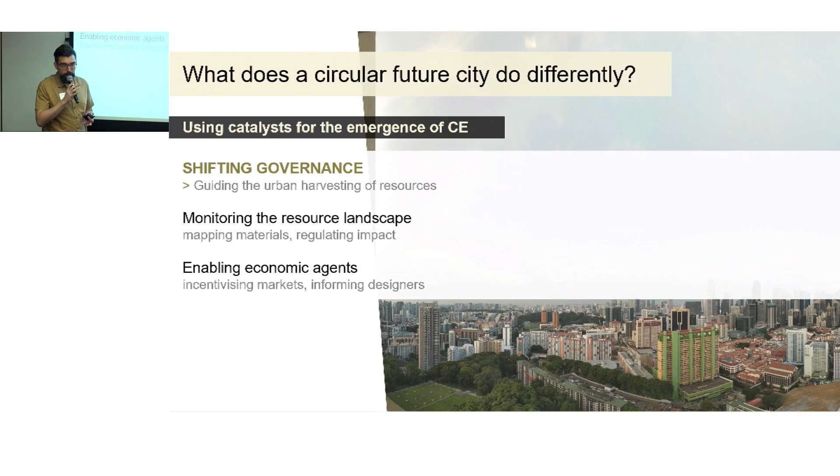The other aspect is enabling economic agents. It's, of course, an economy. It needs to run by itself. So there's an aspect of incentivizing markets, but also informing designers, for example, as agents to create structures that have more value that can be retained for longer.

Of course, within the FCL Global program, we're looking at new technologies and how that can help understand the circular economy of construction. And three aspects there are particularly important. One is mapping stocks, flows, and yields, as I already mentioned, but also evaluating built assets in terms of circular economy objectives. So not just in terms of money or not just in terms of carbon, but how do things work in this flow of resources?

Finally, it's also important to look into how can we trade, because we're talking about an economy. So how can we trade future building information is important. Buildings are particularly difficult because the value, the materials come out maybe 100 years from now. And the information that's tied to these materials, to these buildings, strongly influences the value we give to it. So how can we bring that future information into the present is another technological question that we have proposed solutions for.

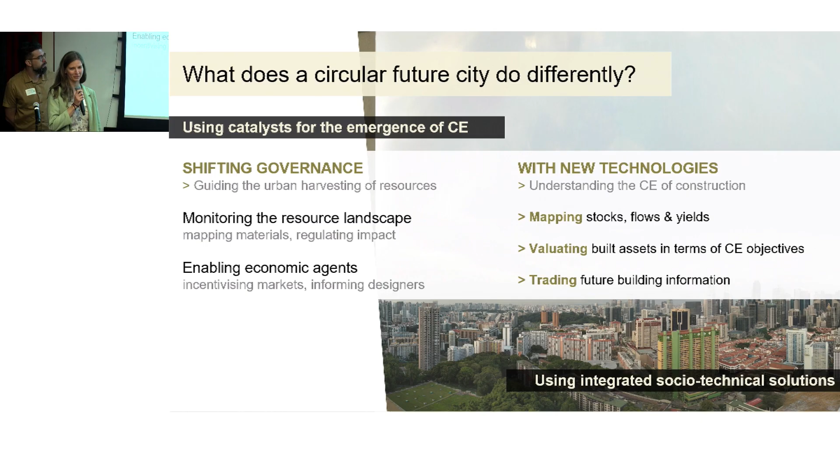Okay, so now it's my turn to tell you a bit more about the research that we have done in our module. So let me start with different examples of how we can map material stocks. And the first example has to do with energy performance certificates. So this is a kind of data source that we have plenty of in Switzerland for thousands of buildings. So then we're able to extract material information from these building certificates.

So here, for example, you see a concrete building somewhere in Switzerland, and we were able to extract information about the main material type and also the size of insulation. And then this combined with architectural knowledge enables us to study how much material there is in different types of buildings and analyze that in the context of how building characteristics can influence the material composition in these buildings, both spatial patterns, temporal patterns, also other types of characteristics.

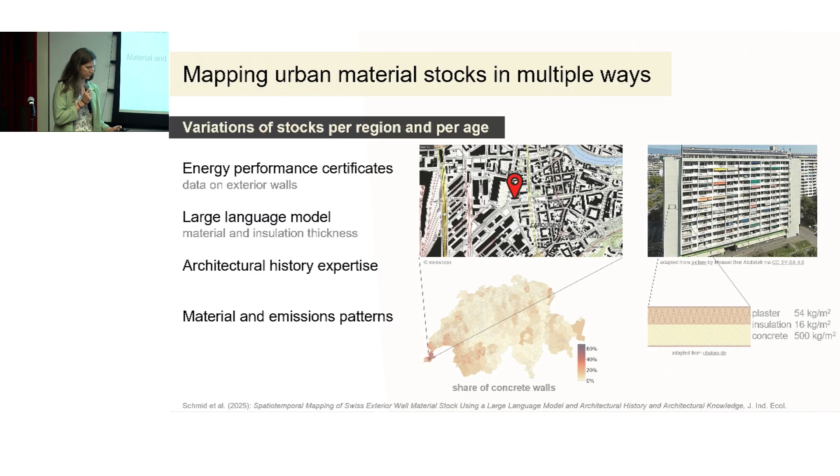Another example, again, mapping material stock, is in Singapore. So in Singapore, unfortunately, we don't have as much information on materials in buildings. But then for the few building instances that we had, we were able to develop parametric archetypes that then exploit some similarities between buildings to be able to extrapolate material information to the level of the entire country. And then this allows to quantify information, for example, on amount of concrete or steel.

One more example of how we can map material stock has been performed on different cities. Here you can see Cape Town, Zurich, New York, Tokyo. What we exploited here is Google Street View data. So when you walk around on the street, you see building facades and are able to see what kind of material is out there, how many windows, size of windows. This model exploits computer vision to use street view imagery to analyze material information from facades.

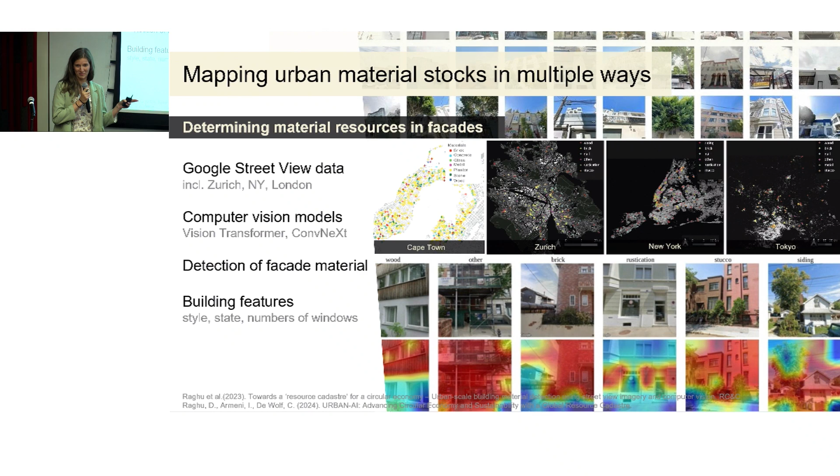Also building features like style and state, for example deterioration level. We're actually now working on combining this with the other model, because one gives us information about what's inside of the building wall, and this one gives us information on the outside. So that's work in progress still.

Another aspect of our research concerns trading information. As Peter has mentioned, we need to enable actors to exchange this information effectively. So we might know what's inside of our buildings, we might know what kind of materials are available, but you still have to exchange this information to manage it, to store it. So this research has explored the centralized data marketplace, and how a decentralized system could be a more efficient way of handling this kind of information.

When it comes to different actors that we have, we also want to inform designers on which kinds of circular economy objectives are out there, and depending on the objective, which here we highlighted three: longevity, reusability, transformability. These three might be important to a different extent to different designers. So we have created this framework that explores the links between the objectives and the design strategies, and then the methods that can be used to explore these.

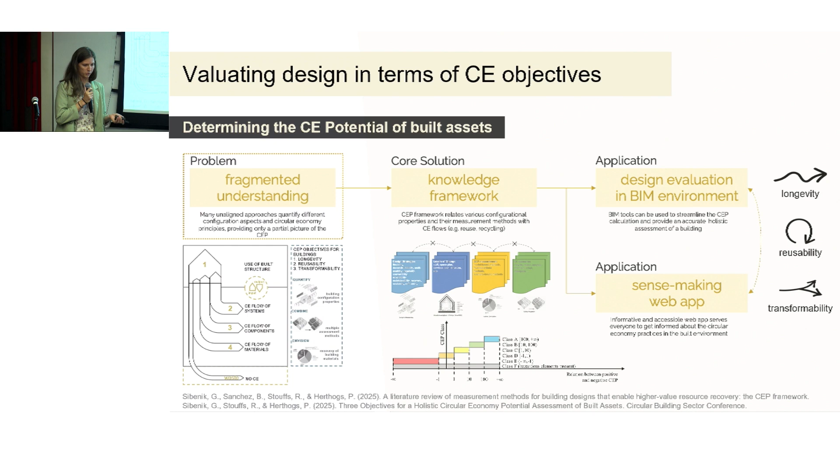One application of this framework that we also explored is built afterlife. It's a QR code that you can scan, also visible on the tablet that we have on our module table. This basically allows you to explore these different objectives, for example longevity.

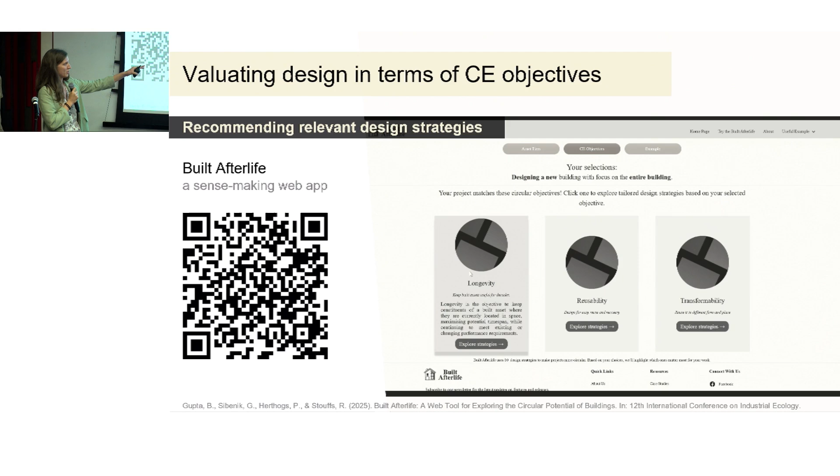So how lifetime extension can be important to you as a designer, and what methods you could apply in your work. Next example, also related to actors, is that we cannot take for granted that just because we're applying a circularity strategy, it will be beneficial for the environment. So this is an example of research that has explored the impacts of material reuse.

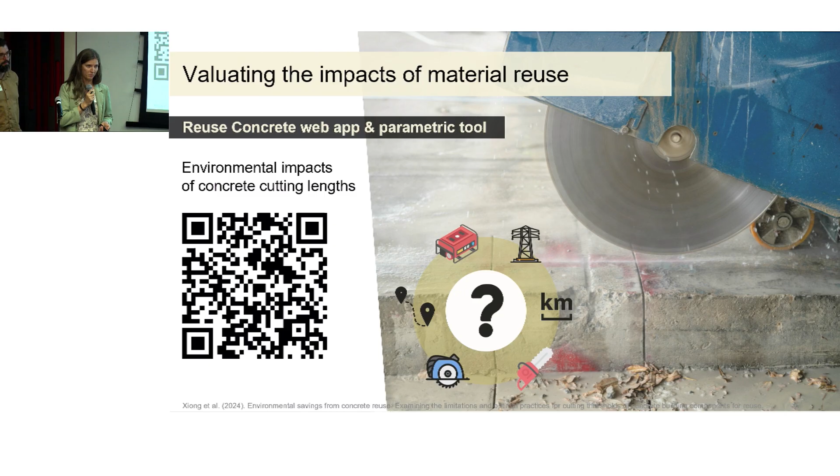In this case, it was reuse of concrete, and how different parameters of concrete reuse can influence environmental performance. Again, you have a tool that you can scan via QR code, to explore how different parameters, like the length of cutting, the transportation distances of these concrete components, will impact the environmental performance of this.

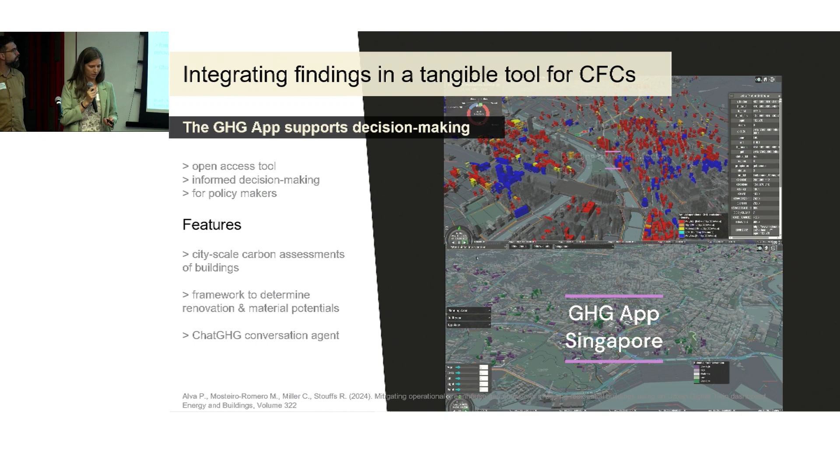And let me hand over. Okay, so that was a short overview of the technological outcomes of the Circular Future Cities module.

But of course, we also need to bring it back to the importance of governance. So throughout the module, we have been dialoguing about pathways to circular future cities with various stakeholders. Some of the things that have been going on in the last months, because this is what we're currently focusing on: for example, in July we had a special session at the ISAE 2025 about policy and paradigms.

We're putting the finishing touches on our synthesis paper, which looks at the type of technological innovations that typically come up in circular future cities related research, ours but also others, and putting this in a governance framework. We will also have a final session in our advisory board series, which looks specifically at how we can translate some of our outcomes into formats that are more useful to industry and governance. Thank you.

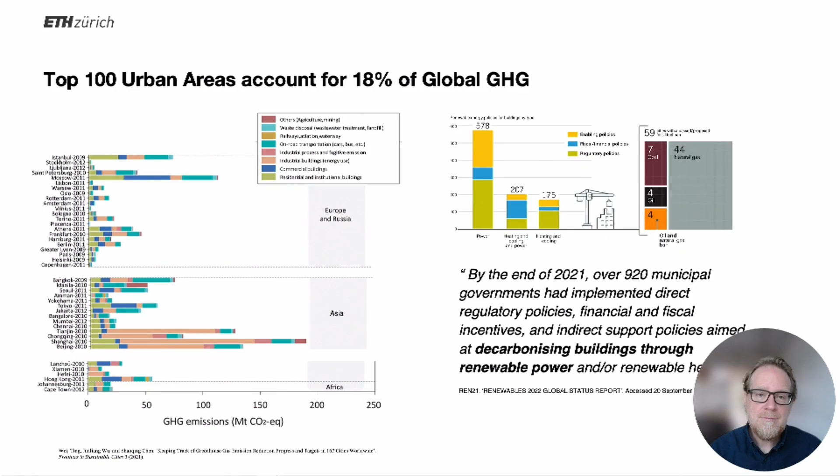One way to increase renewable energy production on the urban scale is what we call urban photovoltaics. The placement of PV modules on rooftops is commonplace and viable. We see this in Singapore, in Zurich, in many places. We are especially interested in what is called building integrated photovoltaics, BIPV, which closely merges energy production with building and infrastructure services. Different than standalone PV, BIPV is a PV module and a construction product together.

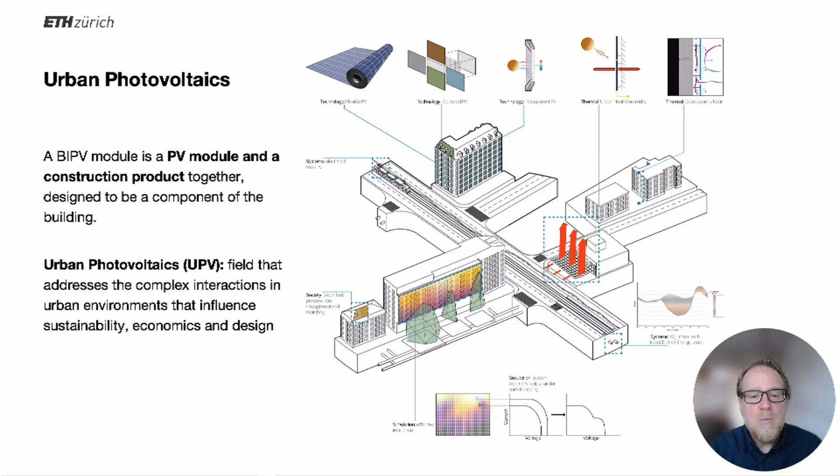Urban photovoltaics is a field that addresses the complex interactions that occur when integrating PV and BIPV in the urban environment, as we can see on the image to the right. This addresses questions of available surfaces, interactions with urban elements, but also how to utilize electricity produced most effectively.

As a module, we work interdisciplinary across different institutions and domains. Our work on UPV can be condensed into six research questions: how to scale, novel methods for estimating urban PV potentials; how to utilize, UPV in electric mobility, so how to use the produced electricity best; how to assess, questions of life cycle perspectives; how to implement, we looked at application case studies in Zurich and in Singapore; how to plan, how to combine different dimensions of planning for urban photovoltaics; and finally, how to design, which toolsets can support designers, engineers, and decision makers to plan and design urban photovoltaics.

In the following, I'd like to highlight the most important findings on those questions. On the question of how to scale, the challenge is that current simulation approaches neglect complex urban effects such as partial shading, which impacts PV system design and yield estimations. What we can see from developing a new generation of modeling techniques is that even when we look closely, UPV holds significant potential for transforming cities into energy producers.

However, this transformation requires careful consideration of matching technology choice and urban characteristics. The realistic estimation of yields of solar energy production requires balancing modeling resolution, so essentially looking from cell to city, with model complexity, the data inputs necessary and available, and the desired output of the analysis.

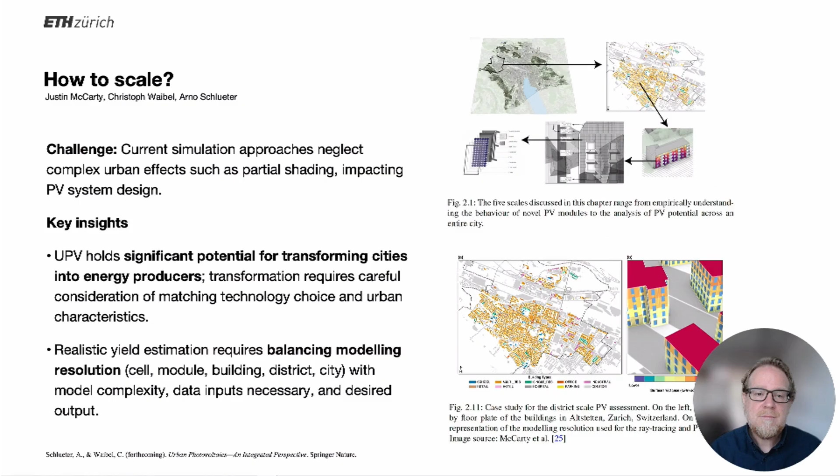On the question of how to utilize, we asked: can excess solar energy production through PV be harnessed using electric vehicles? We have times of the day when the sun is shining strongly and we can produce electricity better than other parts of the day. The question is, can we have a dynamic storage through electric vehicles?

The findings confirm that EVs can function as mobile distributed storage, enabling spatial and temporal balancing of intermittent solar PV generation and demand. We can also show that coordinated planning of PV deployment with smart EV charging and discharging could enhance grid stability and increase renewable energy utilization in cities. To the right, you see the famous images of the so-called duck curve, the difference between the supply of photovoltaics and the demand, and we can see that through EVs as storage, this difference can be mitigated.

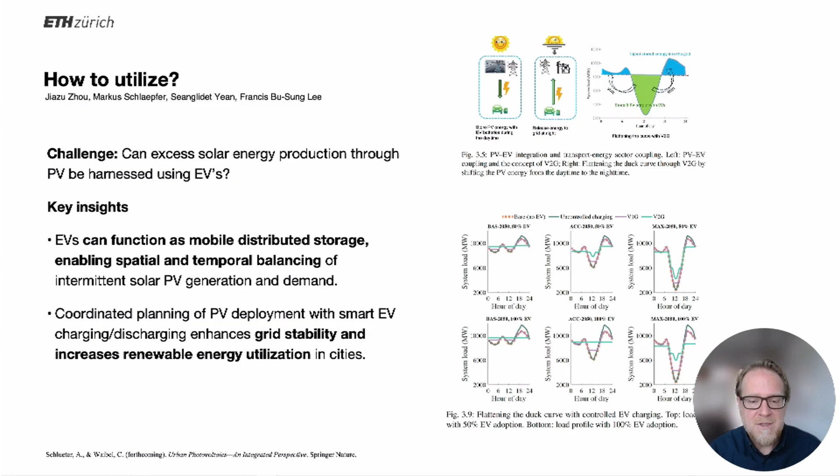On the question of how to assess, we looked at the key determinants for ecological sustainability of PV, and we can show that the life cycle impact depends strongly on the choice of PV materials, the cell type, the production location, and the installation context. When we look at case studies, we can see that the carbon emissions of a BIPV system differ by up to 19%, depending on the assembly locations of the modules, whether you take modules from Europe versus China, for example.

An important factor is the irradiation threshold, the amount of radiation received on a surface, which determines essentially if a BIPV product is sustainable, and that depends on the grid context. We can see that in Singapore, surfaces above 300 kilowatt hours per square meter are already environmentally beneficial, versus in Switzerland, it's only surfaces above 700 kilowatt hours per square meter.

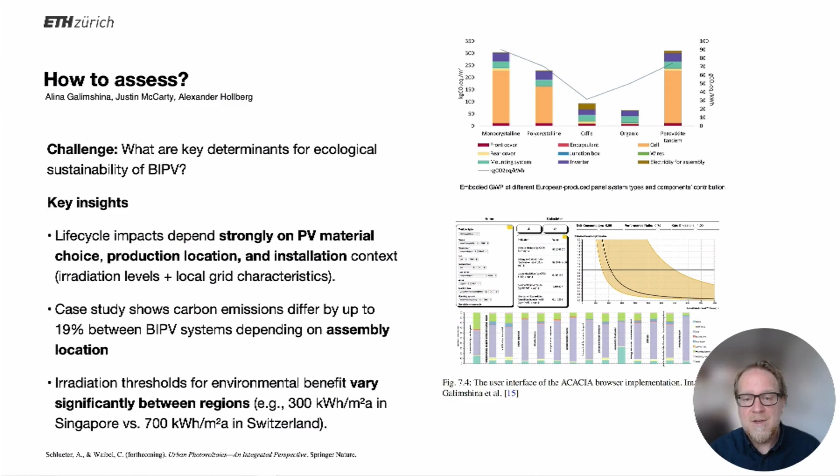On the question of how to implement, we looked at one very specific typology in Singapore, HDB settlements, which are interesting for thinking about large-scale, sustainable, and cost-effective deployment. We analyzed the different HDB typologies and could see that certain typologies actually can be utilized rather well and allow to produce more electricity on the facade than on the rooftop, since they have a lot more surface on the facade available. We looked together with industry partners into BIPV designs, lightweight, fast mounting, and angled designs that fit specifically to the context of Singapore and an HDB context.

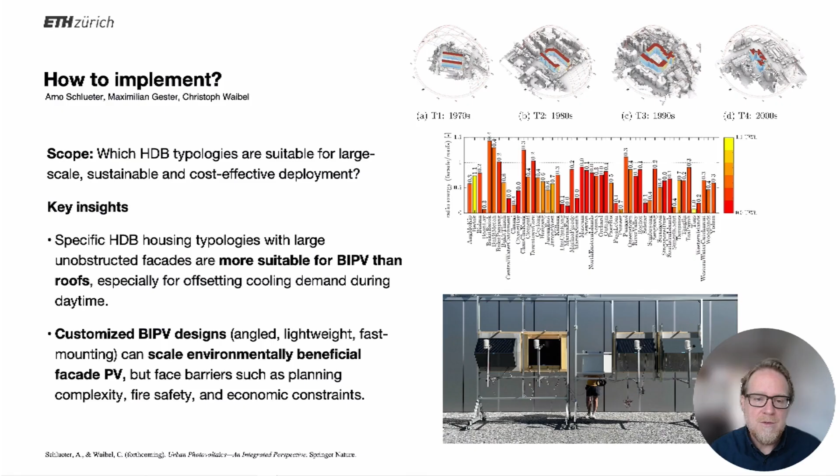We could show that this is environmentally beneficial to produce electricity on the facades with these type of photovoltaic modules. But of course, there are certain challenges in terms of fire safety and economic constraints that might play into this.

On how to plan, we combined different dimensions of planning to address socioeconomic barriers, and the colleagues developed a three-layer framework combining spatial, investment, and operational planning that facilitates these interactions to discover and identify those interactions.

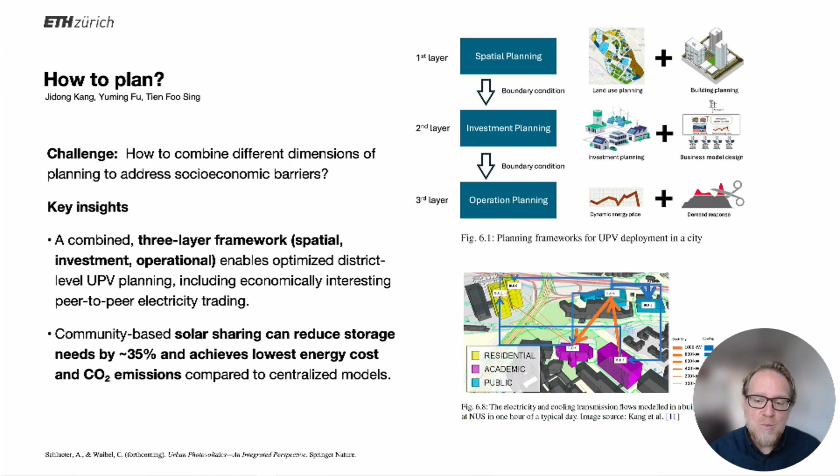One novel form of utilizing solar electricity is especially interesting: peer-to-peer electricity trading, where different generators of electricity trade electricity amongst each other. We can show that community-based solar sharing can reduce storage needs by up to 35% and achieve lower energy costs and CO2 emissions as compared to a centralized organization.

What is especially interesting is AI-driven and data-driven tools that allow us to simplify yield estimation, reduce modeling effort, and also expand the design space, for example through automated generation of PV design variants or automated yield estimation. We believe that the planning of BIPV can greatly benefit from these types of tool sets to become faster, more explorative, and potentially create more innovative ideas for BIPV in urban settings.

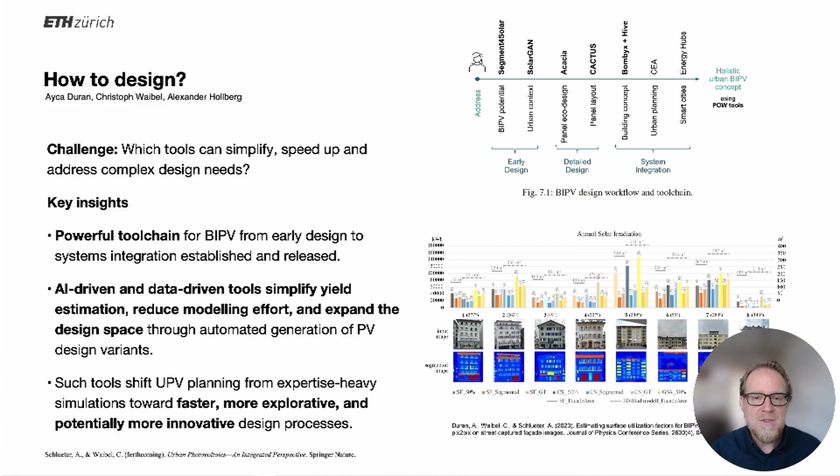Over the duration of the module, we exchanged with stakeholders such as governmental agencies, industry, and researchers in Singapore. We intensely discussed the different challenges for the upscaling of BIPV in a Singaporean context.

From a procedural and institutional level, we observe that BIPV dissolves the traditional boundary between building envelope and energy generation, which creates uncertainty in roles, responsibilities, and procedures. Even more so, it requires interdisciplinary collaboration and integration from design to realization.

From the technical and economic level, we observe higher upfront costs due to custom and non-standardized solutions, and more complex installation and maintenance processes. And of course, as compared to horizontal PV, there are lower total electricity yields on vertical facades. However, the abundance of vertical facades still creates an interesting solar generation potential.

We see a lack of standardized components, which limits scalability and cost reduction. However, advanced manufacturing and prefabrication could mitigate some of those cost penalties and simplify installation.

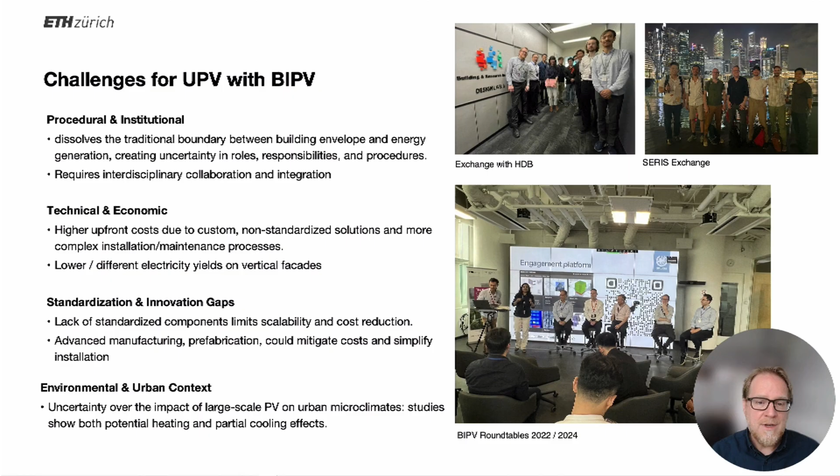Finally, from an environmental perspective, there's uncertainty over the impact of large-scale PV in cities on the urban microclimate, specifically on urban heat. Current studies show both potential heating and partial cooling effects, and currently we follow up on this question in our lab in Zurich, where we've installed a full-scale BIPV facade in our climate lab with an artificial sun, and we experimentally explore thermal effects on the building through the facade as well as in the urban environment through measurement sequences in full scale.

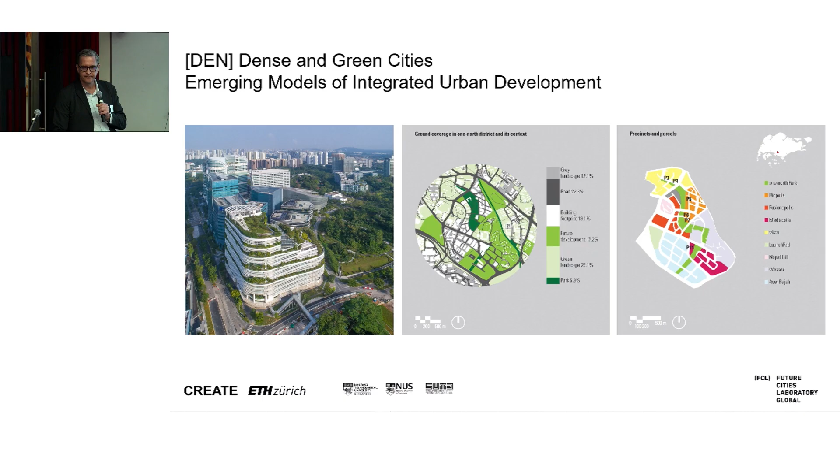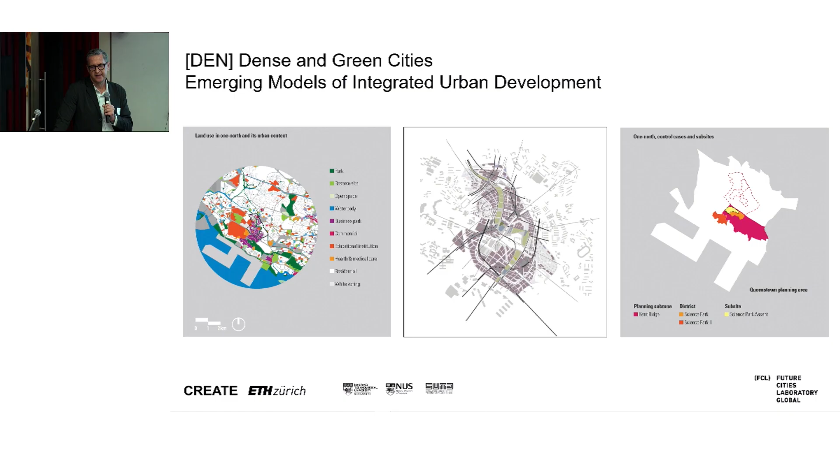For One North, we asked: Spatial, how does its form and integration compare with earlier business parks? Environmental, how effective are its strategies for thermal comfort, biodiversity, and ecological connectivity? Social, to what extent does it foster vibrancy, livability, and community identity? For policy, what governance arrangements enabled or constrained its development? And for comparative, what lessons does it hold for other tropical cities?

So in the following, I will show you just a selection of our analytic work to illustrate methods, but because of time, I cannot go into detail here. Again, the exhibition and publications provide a fuller picture. So again, for spatial analysis, we use space syntax and GIS to map connectivity, land use mix, and integration with surrounding neighborhoods. This was complemented by people counting experiments and spatial visual analysis, giving us insights into both flows and perception at the human scale.

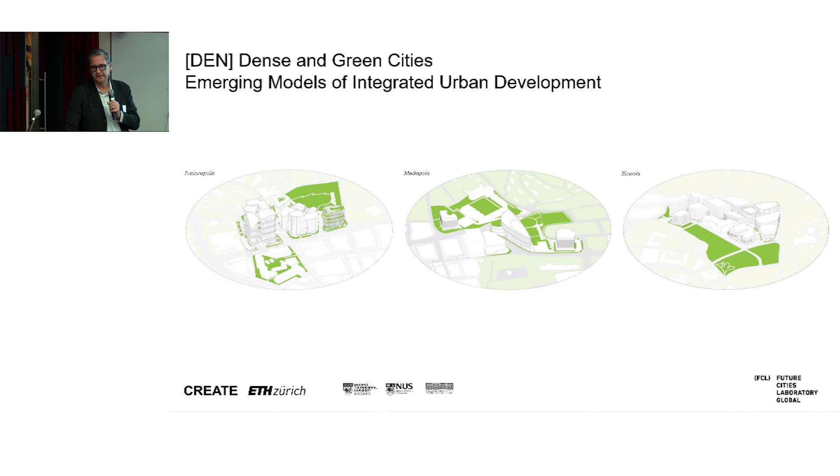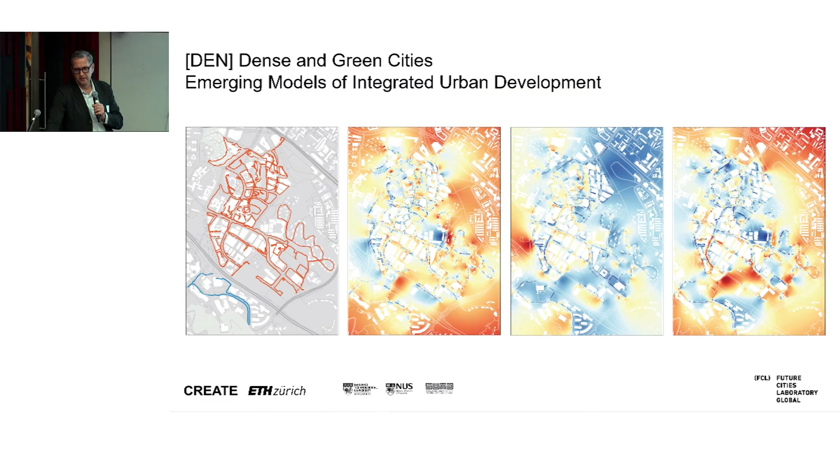So these are just some examples. I see we're a little behind here with the slides. Yes, these are some examples of the analytic illustrations that were produced over the course of our study. So I will just click through them quickly. And again, you find all of this in our publications.

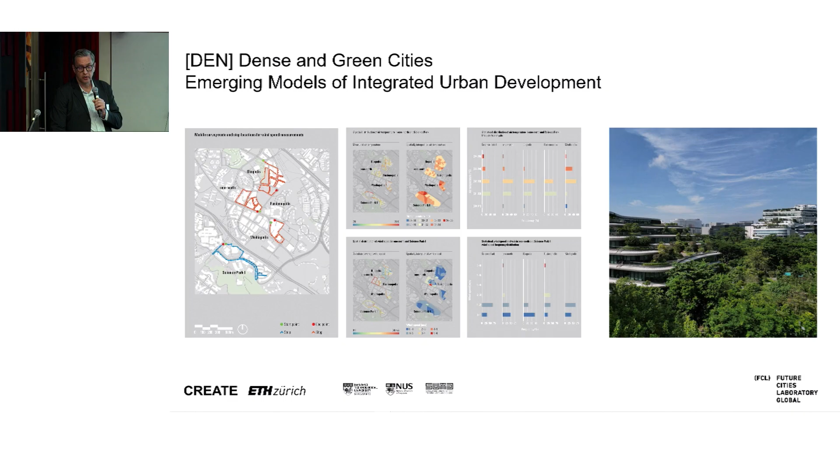As for environmental performance of the district, we conducted mobile microclimate surveys across the district, added shade mapping, and ran CFD simulations. This provided a very fine-grained picture of how form and greenery affect heat exposure. For ecological performance, we carried out biodiversity surveys and worked with NParks data sets to evaluate ecological connectivity, moving beyond ornamental greenery to understand ecological function.

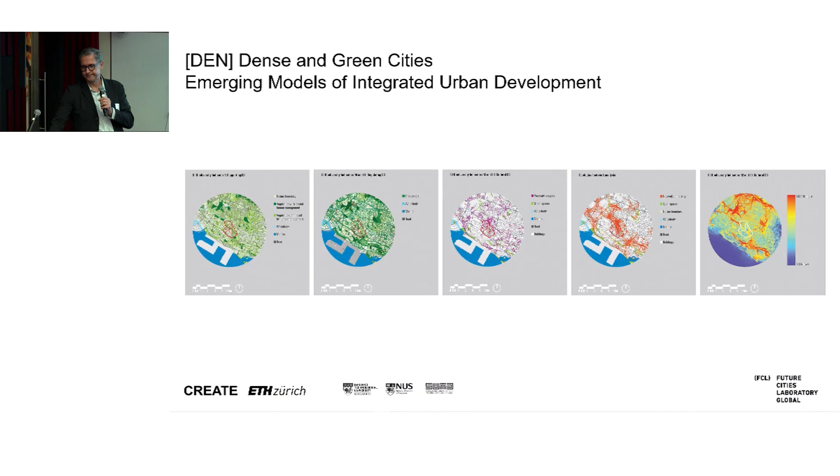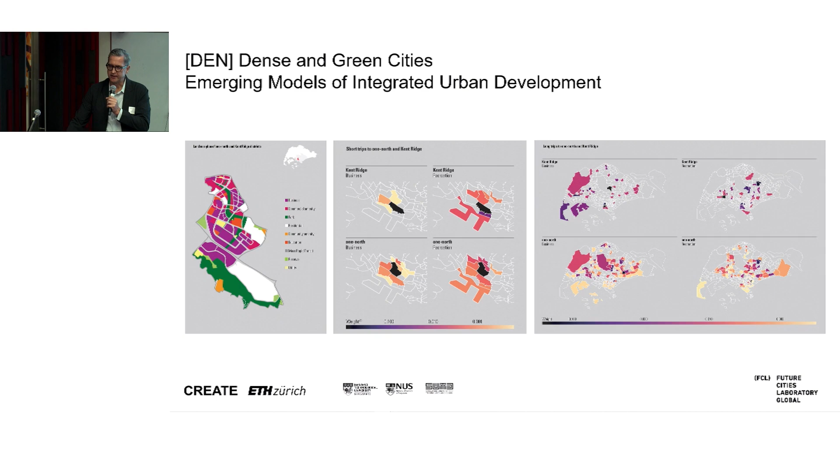In the social and economic performance work packages, we conducted our analysis through surveys, interviews, and GPS-based mobility analysis. We studied vibrancy, accessibility, and community formation. In terms of policy and governance, we reviewed planning documents from URA, JTC, and NParks, and conducted expert interviews, allowing us to trace the instruments, negotiations, and coordination that made integration possible.

For policy and governance, we reviewed again various documents, and already a big thank you to some of the agencies that are present here today. That was very helpful for the work that we did.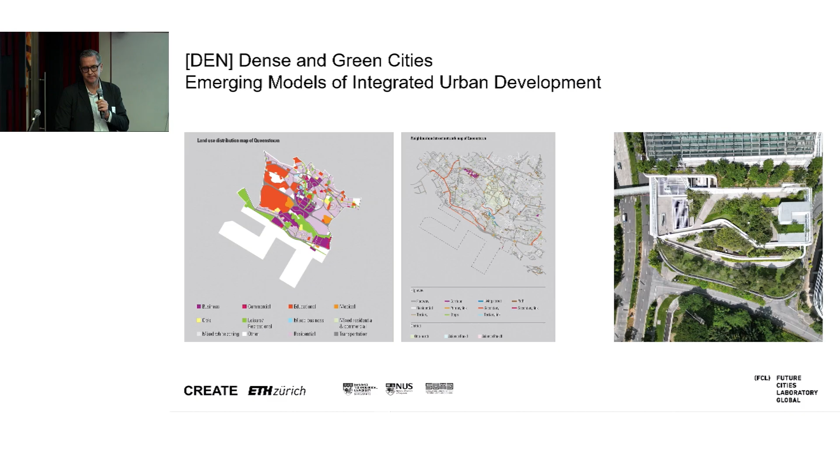So let me quickly go to the findings again. We're pressed for time here. In terms of spatial integration, compared with Science Park 1 and 2 and Cambridge that served as our control sites, One North shows far greater land use mix with housing, workplaces, and amenities all within walking distance. It has far better transit access. I'm sorry, I'm behind here. Served by 2 MRT stations as well as connected bus routes. And it achieves higher walkability with finer grained pedestrian networks. This is the first time we've been able to quantify at this scale how a tropical innovation district performs compared to earlier models. The results confirm really what we think is a paradigm shift.

For environmental performance, our microclimate surveys demonstrated quantitatively how tree planting and bioclimatic design reduce ambient temperatures across One North's public spaces, in some cases lowering heat stress by up to 2 to 3 degrees Celsius compared to the control cases that we studied. Biodiversity surveys confirmed richer species presence along ecological corridors than in earlier business parks. Remote sensing confirmed higher green coverage ratios, marking a deliberate move from ornamental planting to functional ecological networks. Together, these findings show how integrated design can measurably mitigate heat stress and support biodiversity in the tropics.

For social vibrancy, our surveys showed that users value the mix of amenities, green spaces, and accessibility. Both residents and workers rated One North higher than earlier science parks in terms of vibrancy and identity. Our observations showed public spaces remained active throughout the day and the evening throughout the week. Most importantly, shaded and walkable streets directly correlated with higher levels of interaction, showing how spatial and environmental integration translate into social vibrancy. For policy, I think there are 3 key lessons that we want to share here today.

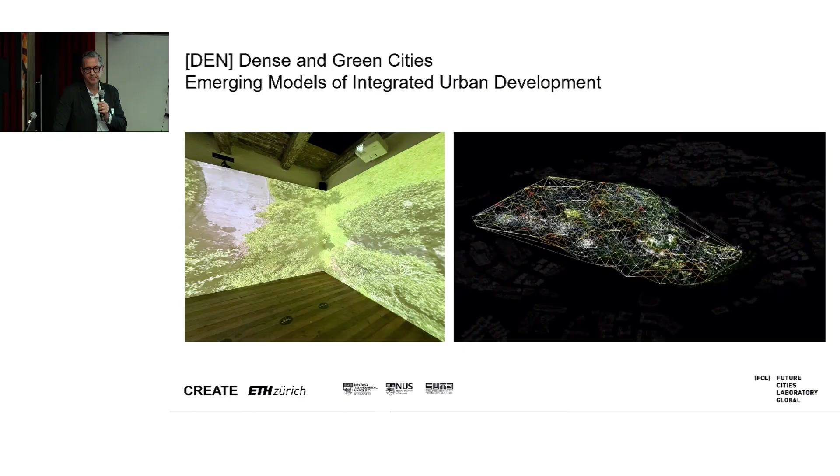It is also part of the Time, Space, Existence exhibition at Palazzo Mora. And beyond this, our team has published numerous journal articles and conference papers and supported doctoral research, including a thesis successfully defended just last week at SUTD. We will also showcase our work in the upcoming Singapore Design Week at the Design for Care event. So, in sum, these outcomes show both the rigor of our work and that there is international resonance for the output that we have produced.

Looking forward, so what's next? At the Future Cities Lab, we see projects like One North as important experiments shaping the cities of the future, but challenges remain. How to maintain affordability and inclusivity, how to adapt as demographics, technologies, and climate evolve. These questions point directly, of course, to the next phase, FCL4, where the tools and lessons from One North will inform new frameworks for greener, healthier, and more inclusive urban futures.

So to conclude, our research shows that dense tropical innovation districts like One North can achieve measurable gains in integration, thermal comfort, biodiversity, and vibrancy, but only when supported by long-term coordinated planning. For Singapore, One North is a reference point for future development. For the world, it is an important case for sustainable tropical cities. At the Future Cities Lab, we are committed to carrying these lessons forward from proof of concept to scalable strategies.

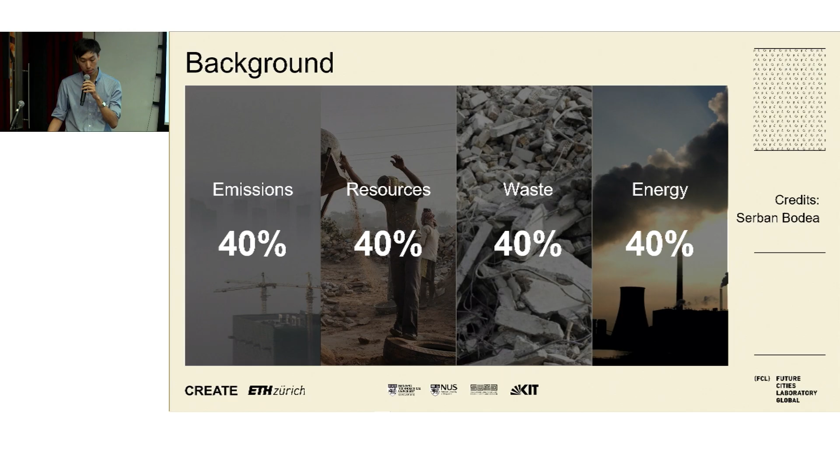The building industry accounts for nearly half of global CO2 emissions, resources utilized, waste generated, and energy consumed, respectively. And the economies of most building materials are also linear, where they are immediately disposed at the end of their life cycle, thus filling up our landfills and incinerators. So to ensure that we can develop our future cities sustainably, we need to explore the use of sustainable and renewable materials that have a circular economy in the built environment, where instead of going to the grave at the end of their useful life, they can be further used to create new materials. And the material in the case of our research is mycelium-based composites.

Mycelium-based composites are sustainable biocomposites where, depending on their density, they can be seen as greener alternatives to lighter construction materials such as polystyrene, which is normally used for insulation, or to denser particle boards that are used for more structural applications. This composite consists of two main components, first of which is the mycelium, which is the vegetative part of the fungus, and the woody substrate.

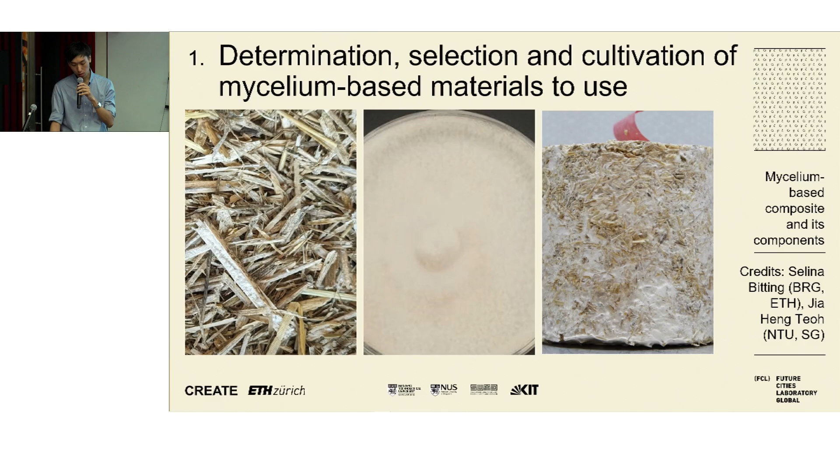So firstly is the mycelium. When a fungus grows, micrometer-sized filaments known as hyphae, a network of which is called the mycelium, will grow and extend throughout the substrate, and in the process, they bind the loose fibers together. And as such, they act as natural binders without the need of additional glue or chemical additives. The mycelium also helps to contribute to the mechanical strength and the acoustic and thermal properties of the overall composite.

Examples that we have used in our research include the oyster mushroom, scientific name Pleurotus ostreatus, or the lingzhi mushroom, Ganoderma lucidum. While both serve their purpose well as natural binders, as with all organisms in nature, different species will have their variations. So for example, Pleurotus are more like explorers. They like to reach out and spread everywhere, across narrow gaps and into the air. Ganoderma, on the other hand, are more like exploiters. They choose to conform and stay put once they have colonized an area. And as such, you can see the underlying structure which they have colonized more clearly and distinctly.

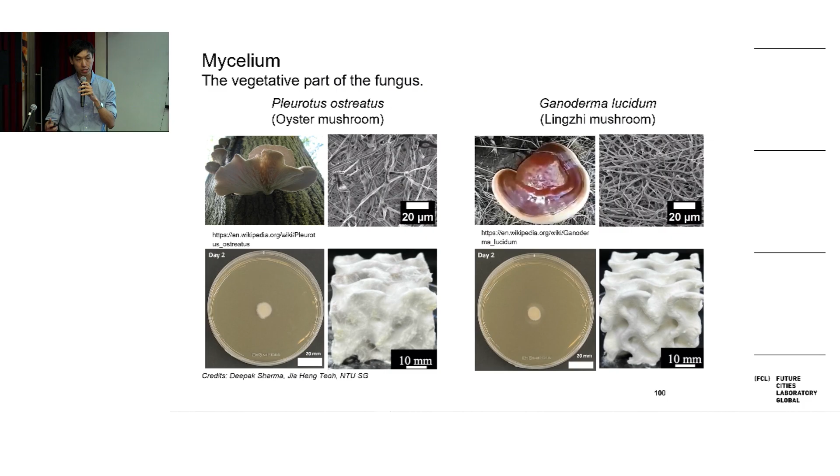The second component is the substrate, and the choice of which depends on regionally available organic waste streams. Examples in Europe will include nettle, rapeseed straw, and hemp, whereas in the Southeast Asia region, we will have bamboo and rice husks. And the end result of incorporating these regionally available organic waste streams into the process would be location-specific circular material cycles.

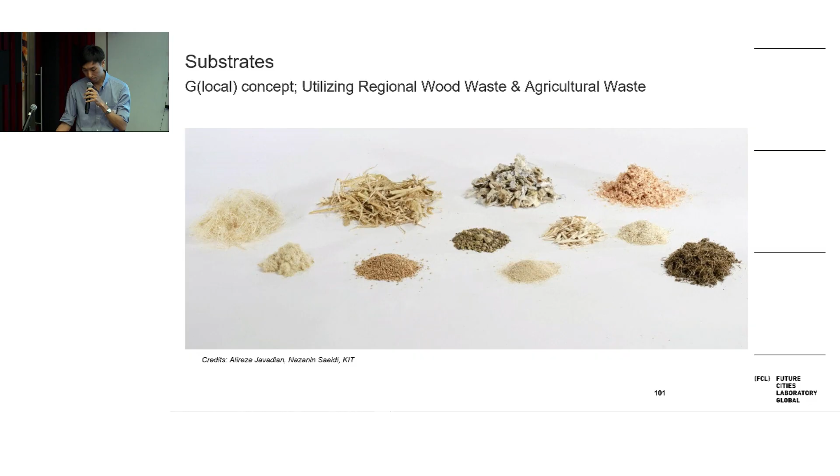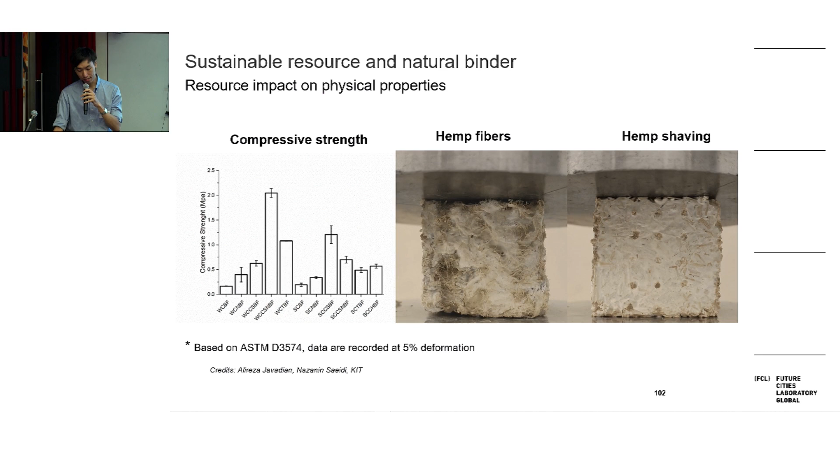So the choice of substrate matters and can create composites that serve different purposes in the built environment, since individual particle size and type of substrate will affect how the mycelium grows around and inside the composite and how it behaves when it's deformed. So for example, one key difference between hemp fibers and hemp shavings is the particle size. And you can see the resulting composite here deforms differently when you compress them.

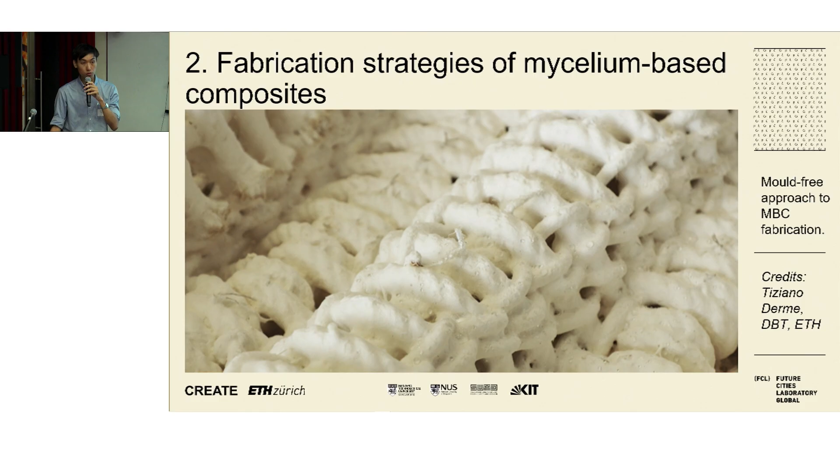Next will be the fabrication strategies that we have employed to fabricate these mycelium-based composites. So firstly, to complement our fabrication strategies, we have designed controlled environments of various scales, from large clean rooms to individual incubators, each of which keeps other microorganisms out, which may compete or interfere with the mycelium growth when it's at its most vulnerable during fabrication. And in the case of the incubator, it allows for parameters such as temperature and humidity to be controlled for optimal mycelium growth.

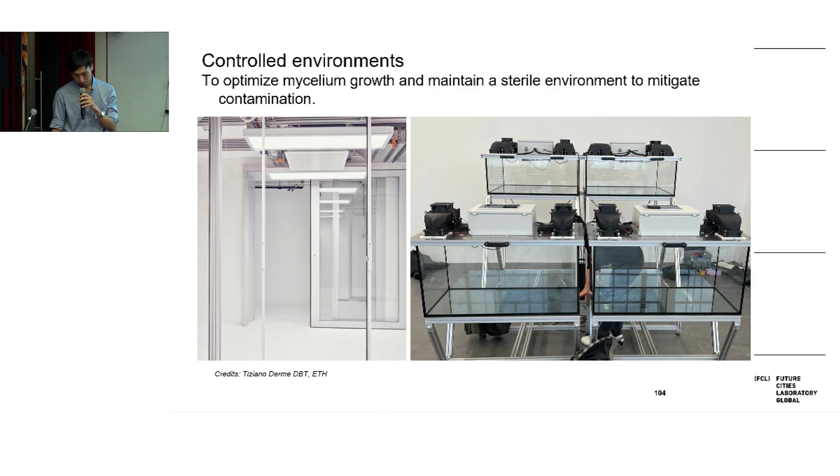Across the three different groups in our module, we have employed different fabrication methods to create mycelium-based composites of various shapes and functions. First, on the leftmost column would be through the use of molds. Here, the composite will conform to the shape of the mold used, which includes simple shapes like cubes, to complex ones such as textured tiles, which are bio-inspired by the elephant skin. For the center column, we will have mold-free approaches, where we have grown mycelium on hemp ropes, which can be weaved or shaped to form complex structures prior to inoculation.

Another example is through the use of textiles, which can be tensioned to the desired geometry, enabling highly adaptable and performative biocomposites. And lastly is additive manufacturing, an example of which is 3D printing, where free-form structures can be fabricated from the ground up using a wood-based ink that is sufficiently rigid and is conducive for mycelium growth. And all three fabrication strategies that you see here are scalable, where we're able to fabricate structures from as small as millimeters in scale up to meters in scale.

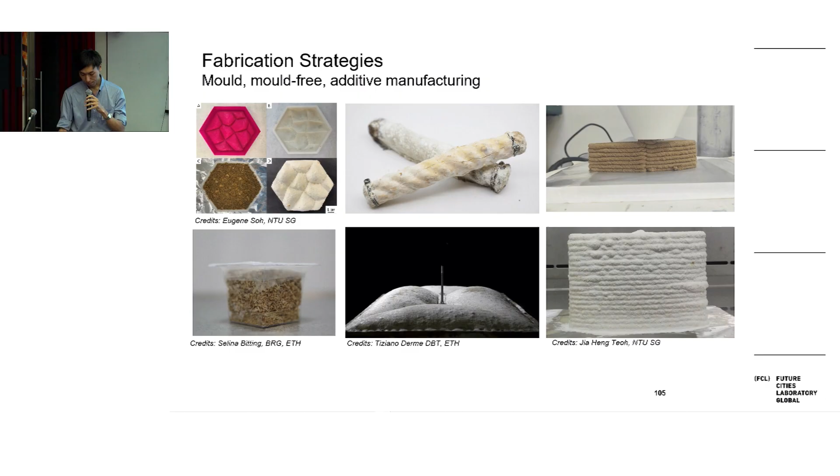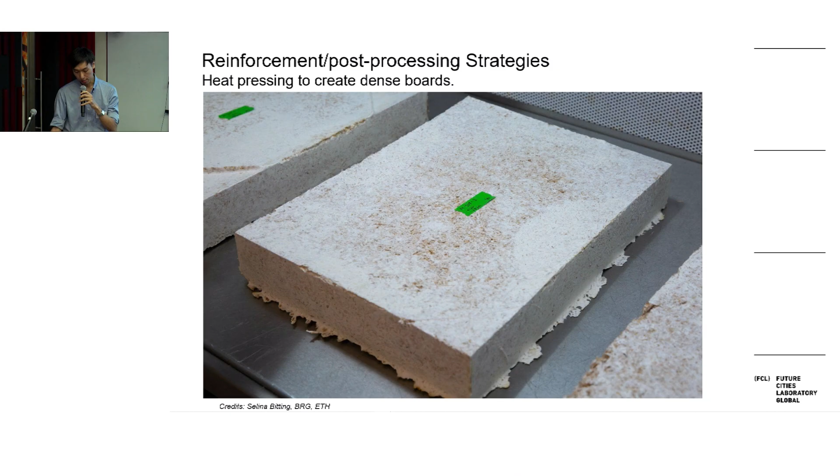And the fabrication process does not stop there, where through the process of heat pressing, we can further use it to create dense boards. In this process, when we apply heat and pressure to different extents, we can densify lightweight composites to various extents to form denser materials. And this process of creating dense mycelium-based composites is also scalable to the order of meters as well.

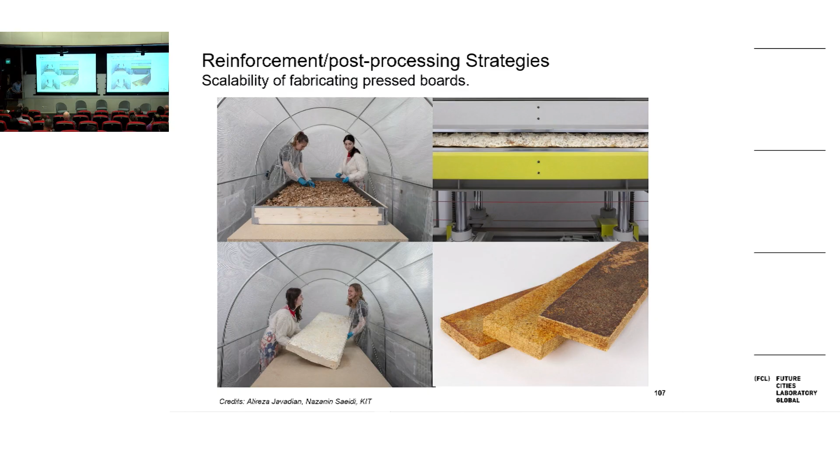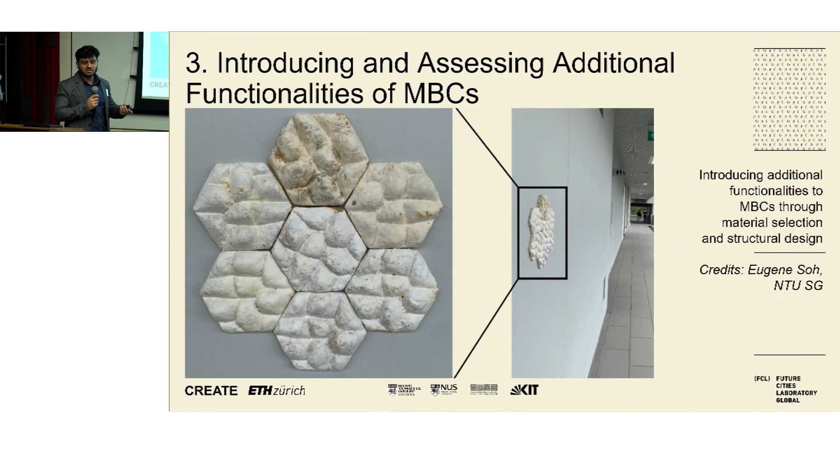These tiles are actually inspired by elephant skin. You see that elephants can live comfortably in hot and humid climate conditions. It's because of this wrinkled skin, which retains water, and during evaporation it cools the body of the elephant. We adapted the same concept in our mycelium tiles, and because of these textured tiles we were able to improve the thermal response by 20 to 75% as compared to plain tiles.

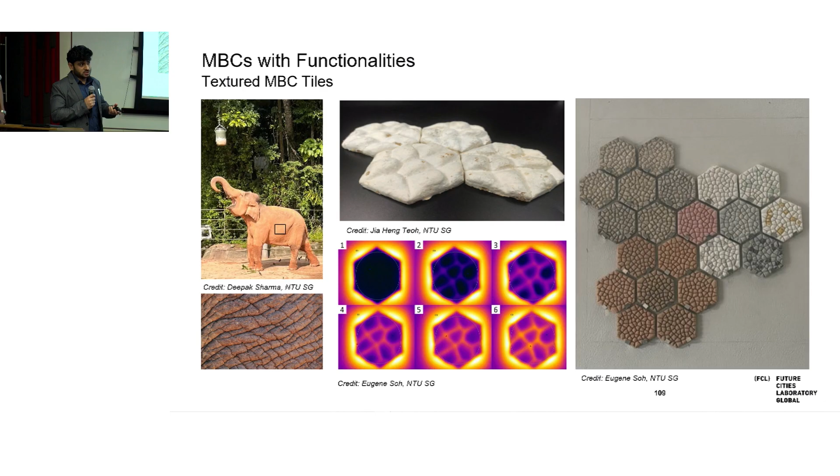We have also installed these large scale tiles at NTU. The goal here is to understand their weathering over a long term duration, and also to gauge the public perception, like how they feel when they see this tile, whether they hope to see this type of tile in their home someday.

Now coming to the scaffolds, we can also improve the mechanical properties, because as mentioned before, the mechanical properties of mycelium composites are not very good, and they cannot be directly used in construction unless we hot press them. But we can use stiff scaffolds.

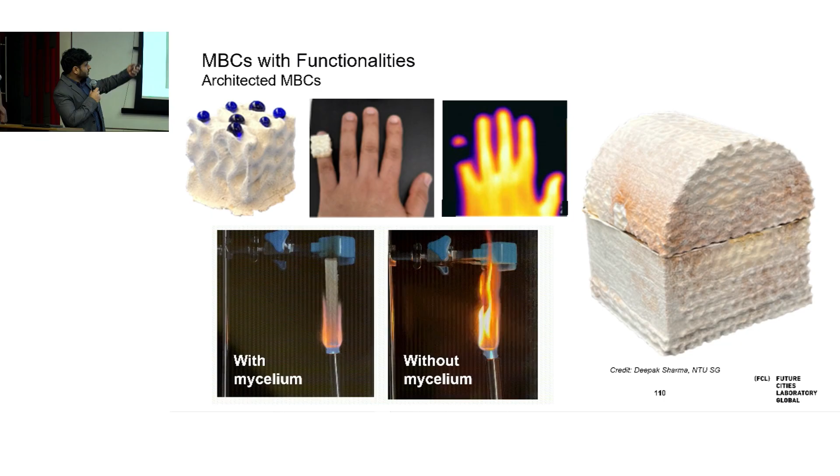Scaffold provides the mechanical strength, and the addition and growth of mycelium improve the water resistant properties and thermal insulation. It can also improve the IR insulation properties. You can see the IR image here. It also improves the fire resistant properties. You can see the comparison between the fire spread in the with-mycelium sample and the without-mycelium sample.

So what we observed from this study is that the growth of the mycelium is actually dependent on the design of the scaffold or the substrate. So to utilize this concept, we built this small mycelium house called Myco House, which has 4 walls, all with 4 different designs. Because of the different designs, mycelium growth is different. And in this Myco House, we were able to maintain a warmer temperature and colder temperature without any external heating or cooling, just because of the mycelium and the designs.

Coming to the environmental impact on the construction sector, here we see the low density mycelium composite. The goal here is to study whether we can use this mycelium composite for multiple cycles. So on the right hand side, you can see our circular process. It started with the growth of the substrate, then use, but at the end, instead of just disposing this mycelium composite, we can regrow it. And on the left hand side, you can see the mycelium composite grown for 3 consecutive cycles. Means instead of just throwing the mycelium composite after one use, we can regrow this, which is more renewable and more sustainable.

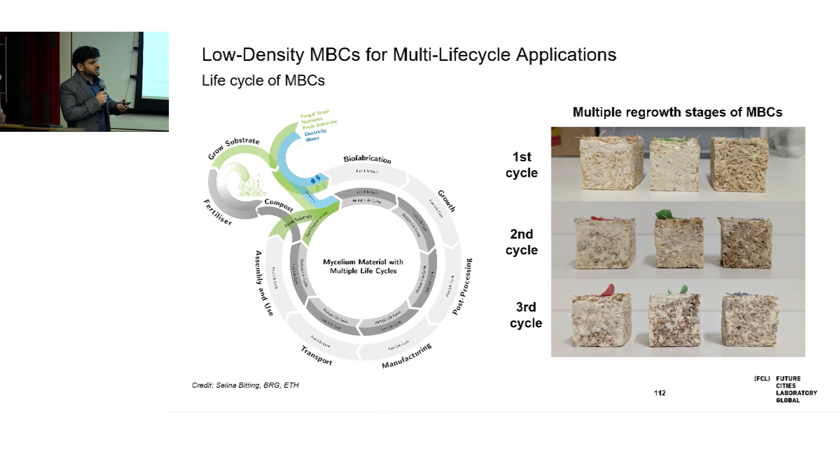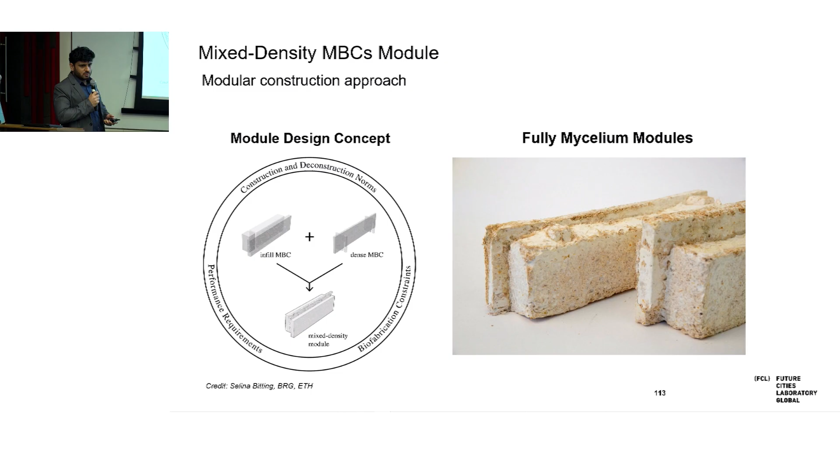Now coming more to the circular design front, we also modeled this modular construction approach, which is a mixed density mycelium panel. It has 3 components: the high density mycelium panel, which is the load bearing panel, and then there is a low density mycelium panel, which improves the thermal insulation and the sound absorption properties. And together they are bound with the help of mycelium itself. So everything is organic. There is no synthetic component in here. And at the end of life, you can just dismount these things or you can even regrow them, completely sustainable.